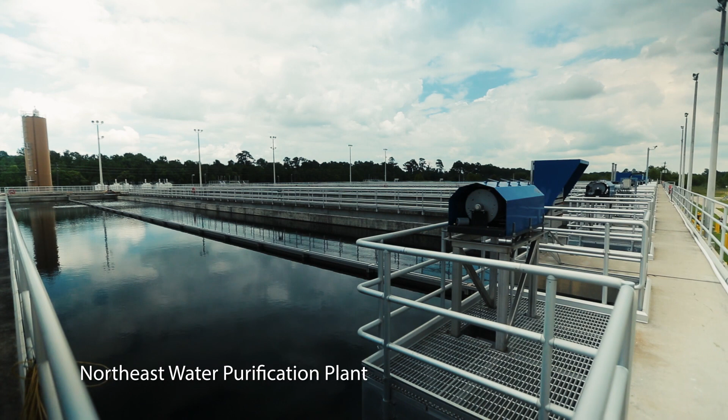So where we are today is we have an 80 million gallon per day drinking water facility that was commissioned in 2006, and it was a joint partnership between the City of Houston, North and Central Harris County Regional Water Authorities. The future of the plant, the expanded facility, is going to continue to allow the City of Houston to produce superior water that exceeds all the regulations, but also exceeds all our customers' expectations.

We are expanding the capacity of the existing 80 million gallons a day water treatment plant to 400 million gallons a day. And the reason behind the expansion is because over decades, Houston has gone through subsidence, and primarily that's because historically we've been using a lot of groundwater instead of surface water.

We have a clay structure such that as the water is withdrawn, the clays settle like a deck of cards would, and there's no way to resuspend that and recover that settling. So that's called subsidence. And that can contribute to water ponding and eventually flooding in a certain area.

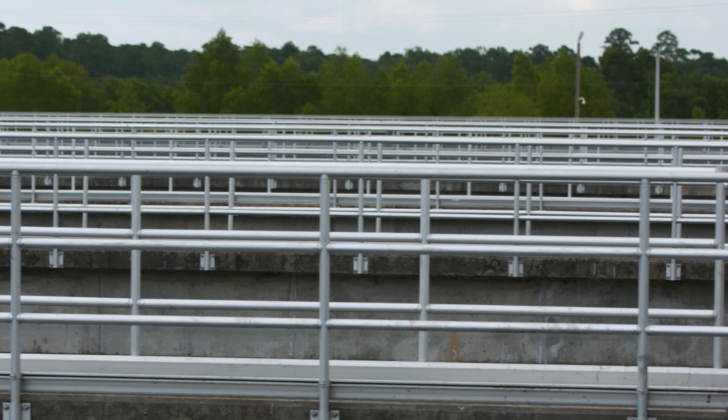The Houston area is prone to flooding, and so we can't afford to have our ground surface lower than it is now. By providing this expansion project and providing surface water as a replacement to groundwater, we are hoping to slow down or eliminate the rate of subsidence in this area.

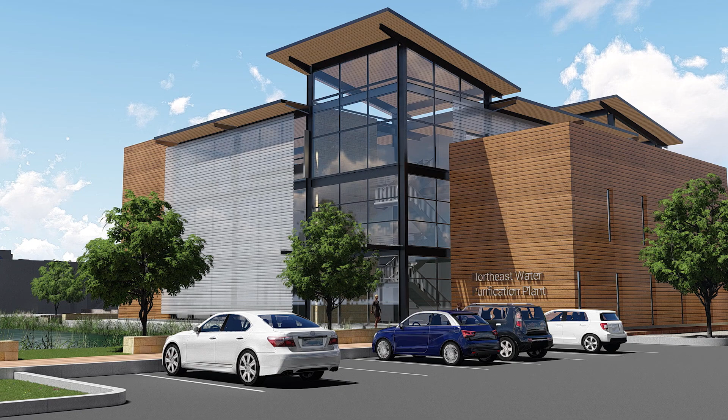It is going to be built in multiple phases. The first module, which will contain 80 million gallons a day production capacity, will be brought online and deliver water in 2022, and the remaining 3 modules will be brought online in 2024. The plant will produce a substantial amount of the region's drinking water for generations to come at a very cost-effective price.

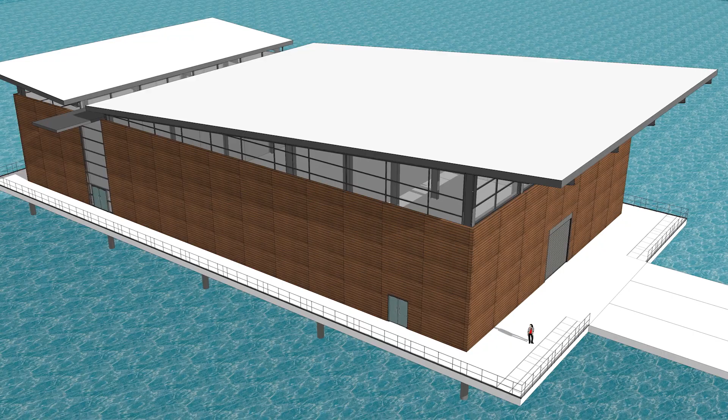So the project will include a new intake out on Lake Houston, and then there'll be 2 pipelines from that intake to our new treatment facilities that we're going to build next to our existing plant. And those new facilities will include coagulation, flocculation, sedimentation, which are used to purify the water. And then we add ozone to the water, which is a really powerful oxidant that will help disinfect and purify the water even more. And then finally there'll be filtration and then pumping that'll send it out into the system.

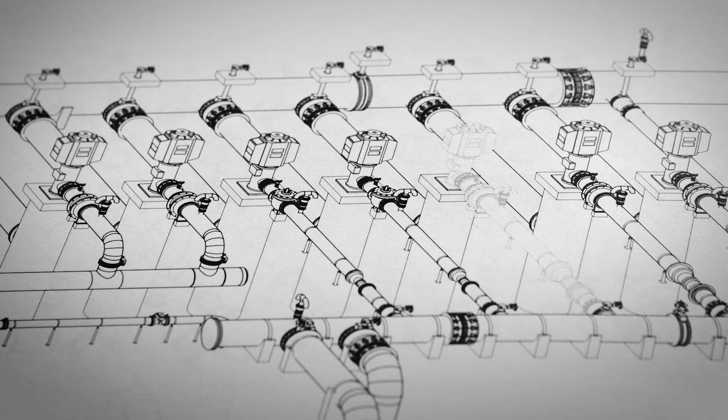Ozone will be a big benefit to this project. It's a newer technology that we're adding into this process that the existing plant doesn't have, and it provides a lot of benefits from disinfection and then its ability to make the water have less taste and odor.

There are currently 4 regional water authorities that are converting to surface water. We are all working together, sharing the cost of the new water purification plant. We will be sharing the cost of the major distribution pipeline to get the water to our area.

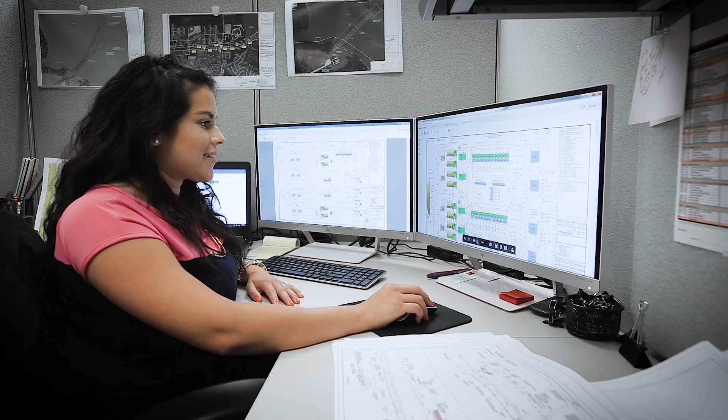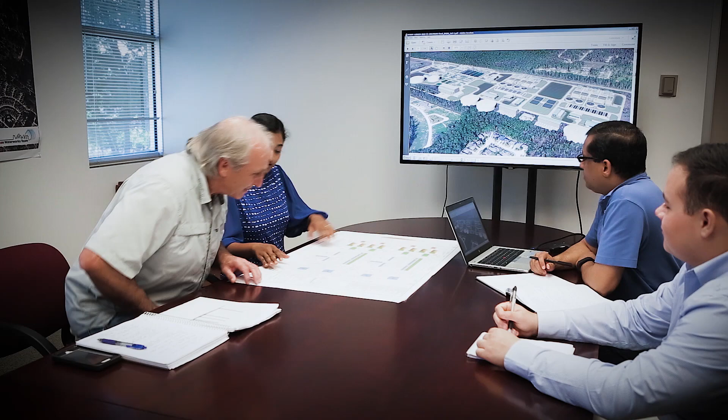It is a very innovative and collaborative approach where we're partnered with the Houston Water Works team to do a progressive design build. In a progressive design build, we're actually partnered with the contractor before we have the design complete. They're helping us look for innovation, they're helping us look for efficiencies, and it is a way for us to have the constructor part of making sure that the decisions we make along the way are the best for operations, for efficiency, and for overall sustainability for the project when it is built.

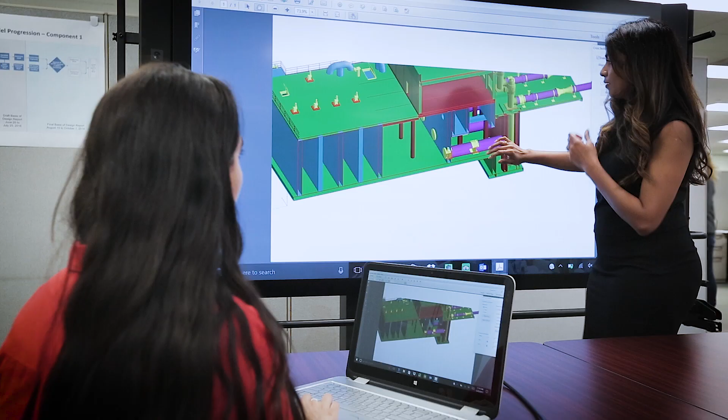I kind of see this as a team of all-stars. Most engineering projects, you have one engineering company that's taking the project from beginning to end. In this case, because we have 5 participants with the different authorities, it is a unique opportunity for the best of the best to get together and collaborate and come up with a really special project.

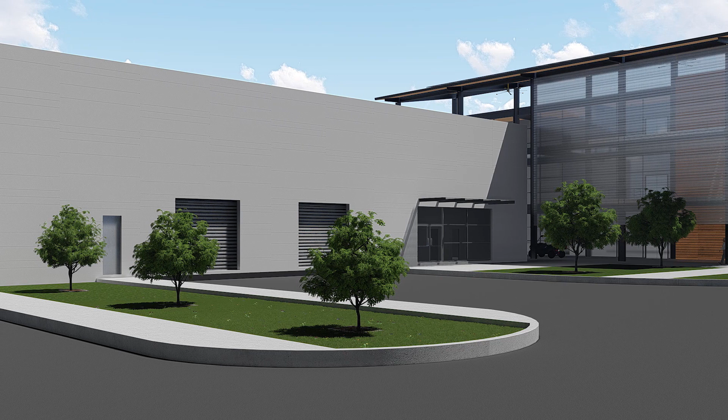So it's important for us to be good neighbors. We want to preserve the natural beauty of that part of Houston, and we want to ensure that folks feel good about this facility from the outside. During the construction of this project, there will be a lot of equipment that's coming in and out. There will be a lot of activity that's happening on the site. But we're going to work hard during the construction to make sure we keep dust down.

We have all of the construction coming off of one of the frontage roads, not coming through any of the neighborhoods. And then the fence that will be put to secure our facility will actually be designed with aesthetics to complement the neighborhood. One of our goals in this project is to be a good neighbor and leave it looking very nice from the neighbor's perspective. So we're going to try and do our best to leave tree buffers around the edges and do a lot of replanting and just, at the end of the day, really make this something that we can all be proud of.

We want to hear from the public about any concerns that they may have on this project, and we have a number that they can call. We also have social media available. We also have the website set up for this particular project. They can go onto that website and subscribe on that website so they will be updated constantly when any change on the project happens.

I look at it as an opportunity for Houston to shine. This is an opportunity for folks to come look at a plant that will be and should be the best in class. This is a project that will serve generations to come. This is a project that will give clean, safe drinking water to the community and will also reduce dependence on groundwater and reduce the subsidence.

The City of Houston provides great water, and the robustness of this plant design will ensure that we can do that well into the future. This is a major, major project utilizing state-of-the-art technology, innovations, collaborations, partners in order to make it happen, benefiting the entire region.